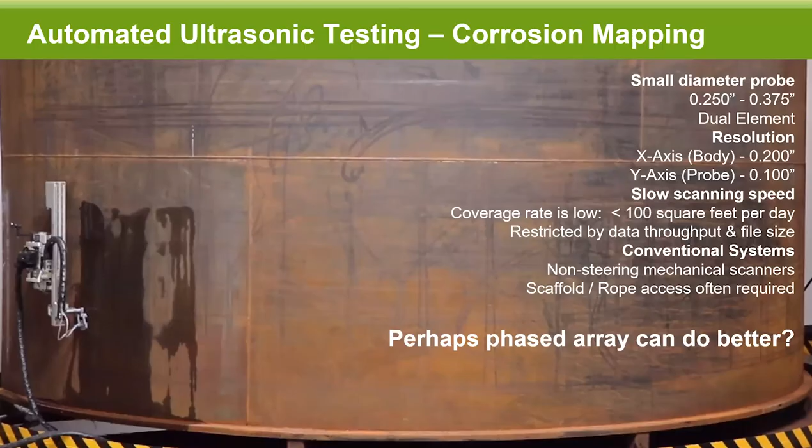Phased array, to sum it up, is multiple probes in a single housing using electronic delay lines to hit those elements to create focusing, steering, and an overall large aperture to work with. You can use linear probes, dual linear probes, matrix arrays, and a combination of a wider range of frequencies. The larger the active aperture of the probe, the higher the productivity can become, especially at 0 degree.

We have the ability to use electronic focusing, and it can be adjusted through the depth. So if we're working with a 1/2 inch material, we can adjust the focalization for the depth we're interested in. If it's 1 inch or 2 inch, we can adjust the focusing for that, provided we have the right probe and setup. We're going to be talking about using electronic and passive focalization today to increase the probability of detection. All of this together provides a very high resolution imaging option for doing damage mechanism reviews.

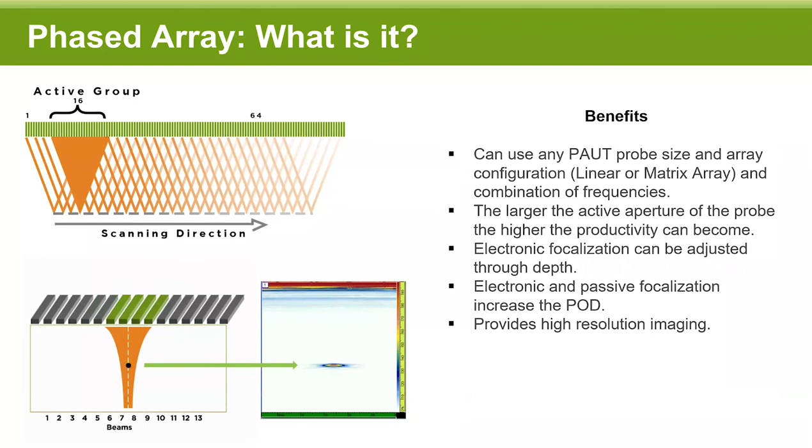Here on the bottom, we have the 3/8 probe doing conventional ultrasonics. The probe is moving 200 thou by 100 thou. On the top, we have a 1 1/4 inch probe that's moving roughly 1 inch every time it strokes. So there's about a 5x difference in the overall speed of the system, reducing 5 raster movements that don't need to happen.

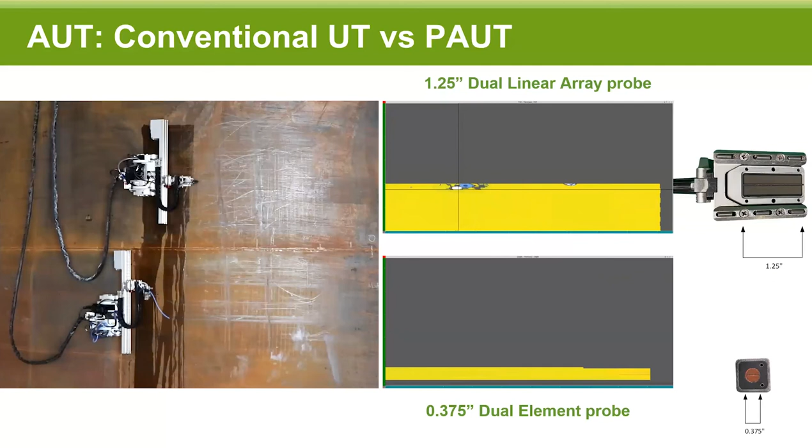Overall, with the traditional AUT down below, what's common is somewhere around a 200 thou by 100 thou resolution. This gives us roughly 50 readings per square inch, or 7,200 readings per square foot. It takes roughly 30 minutes to go 2 foot by 10 foot, so it takes quite a long time to make progress in a given shift.

I've seen these systems also used at a 1/2 inch by 100 thou, creating not really a square image, but you can get a lot of production that way. You can go about 2 foot by 10 foot in about 15 minutes, but then you're not getting 100% coverage. The data creates an image that isn't square, it's more torn in one axis, and it's not good for fitness for service.

So as you reduce or increase the indexing down below 1/2 inch to 200 thou, or 1/4 inch or less, you're going to increase the time it takes to get that imaging done, but overall increasing your resolution.

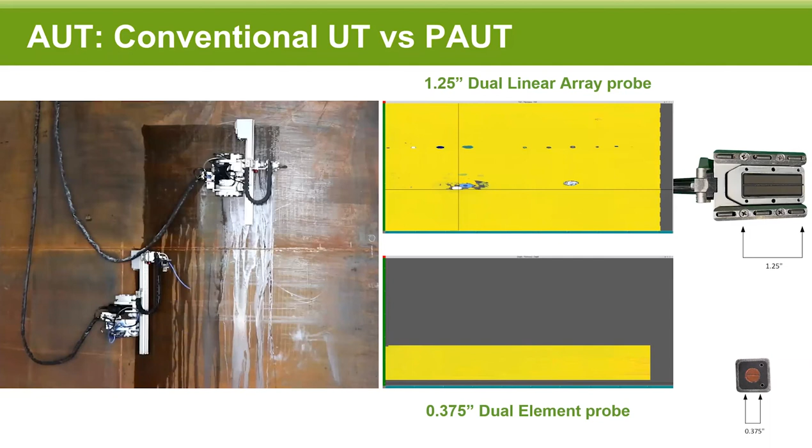Now with the phased array option, we're doing a millimeter by millimeter coverage, which is 625 readings per square inch, and roughly 100,000 readings per square foot. This takes 6 minutes to make a 2 foot by 10 foot scan, providing 100% coverage.

You can see here that roughly the images aren't synced. The one on the right made a 3 foot scan. The actual video on the left is doing a 5 foot scan, but you can see that roughly it's 5 times faster, and it enables you to start looking for any type of damage and start your review as soon as the scan is stopped, versus the older conventional method which is going to continue to go and take drastically longer to get those scans done.

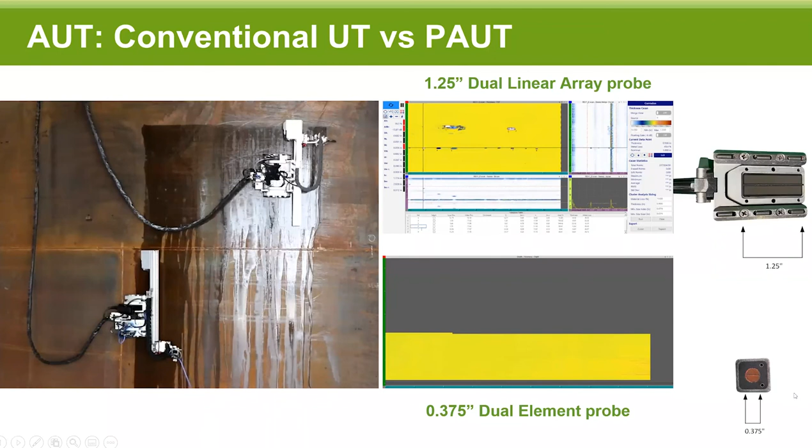So that's kind of a precursor to what we're going to talk about today. We're going to apply this technology for trying to find wet H2S damage. Going from conventional to what we call rapid AUT, applying a phased array to do the things we were conventionally doing with the conventional UT, we can also use it for doing wet H2S damage, but we need to add in multiple other things.

Let's talk a little bit about wet H2S damage. It's a common problem in the oil and gas petrochemical manufacturing industries. It can occur with carbon steel equipment exposed to wet H2S service environments and can come in several different forms. The wet H2S corrosion can be a particularly dangerous form of corrosion because the damage takes place in the interior of the vessel and can occur without warning. There's no corrosion generally at the ID of the vessel. This is happening internally, and it's very hard to detect.

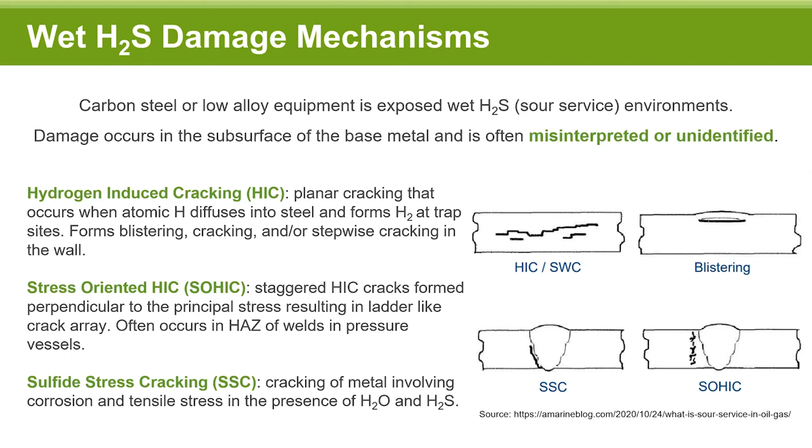So here is the industry standard of the way that this work is currently done.

It's often called a tri-element or triplex technique. These probes are essentially the same setup we were looking at earlier with conventional UT, except you're adding in an angle beam set. Oftentimes you're getting a 45 and a 0 degree, and you're going to want to get that 45 in either an axial and circumferential direction.

So here in front of us, what's very typical is you've got a dual element UT probe, and then you have your 45 in one direction and your 45 in the other direction. This allows you, with it being in one beam and one housing, to capture all this data in one go.

But you use the 0 degree to find laminations and inclusions, and then the angle beam to look for periphery cracking, stepwise cracking in that axial and circumferential directions.

There are many advantages to bringing all these groups together to provide one inspection pass to find damage. However, being that its underlying technology is conventional UT, there are many drawbacks, such as lateral resolution, index resolution, and the production per shift. It's a fairly slow gathering process for scanning the area. Overall, it generally gets somewhere between 80 to 120 square feet per shift.

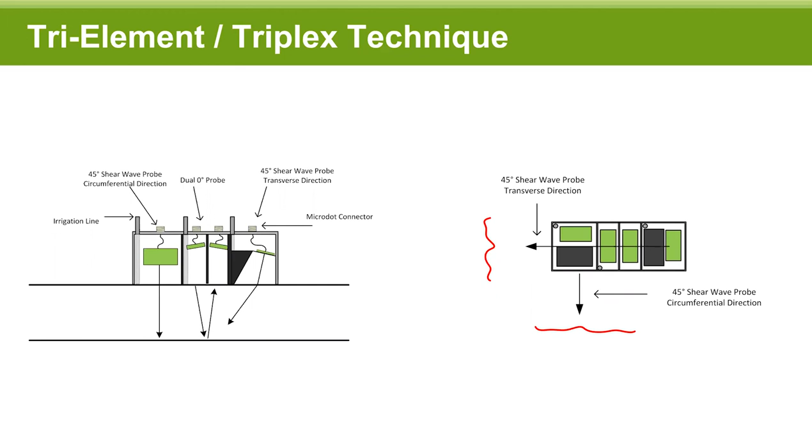Let's dive in a little bit about what that data looks like. Most importantly, the larger issue of the technology is the lack of data density, and the lateral resolution is very poor. It creates poor imaging resolution. This is magnified by the lack of focusing, often out of focus for the range of material you're looking at, whether that's half-inch material or 1 inch or 1.5.

Oftentimes that focus is either beyond or too early in the beam set to be able to accurately do the imaging. This creates fuzzy imaging that often leaves technicians needing to do further prove up, either through phased array or TFM. So there's a lot of drawbacks to it, as far as being very slow to produce the relevant scans that you need. And it always needs some kind of follow-up to make sure you can see the periphery cracking, the stepwise cracking, or any ID touching cracking.

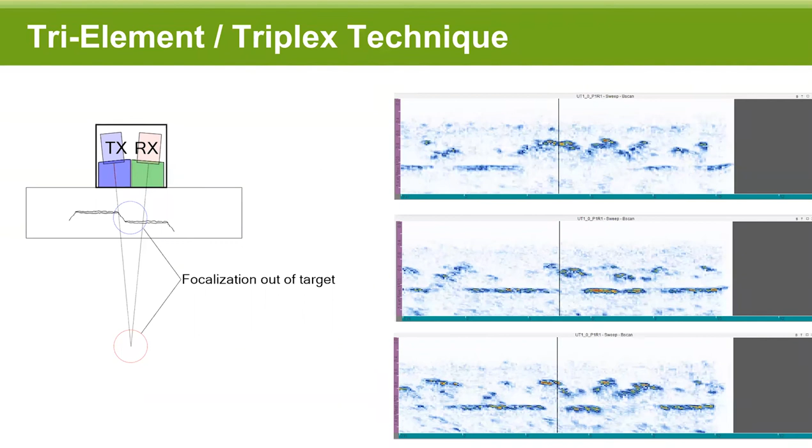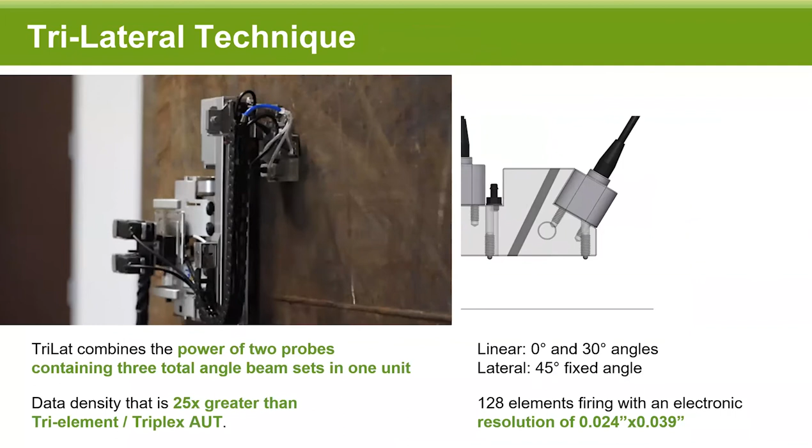All right, let's jump into the next one. So with trilateral, we essentially took that technique and applied phased array to it. This was very challenging to overcome, trying to get those 3 beam sets all in one scan apparatus. But we essentially put 2 probes in a housing with the 3 angle beam sets.

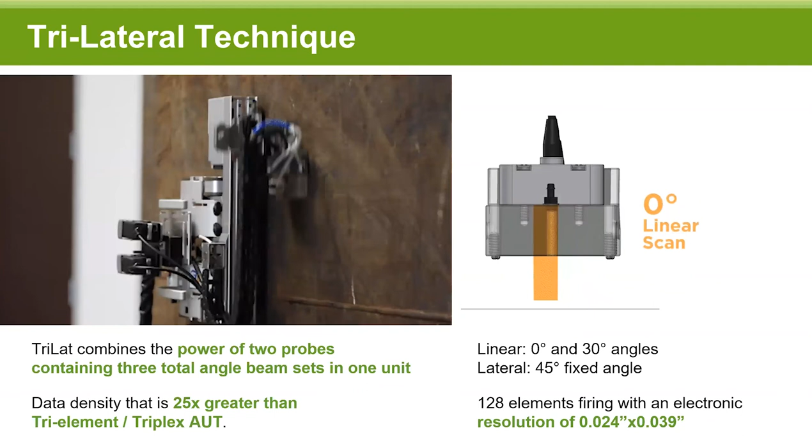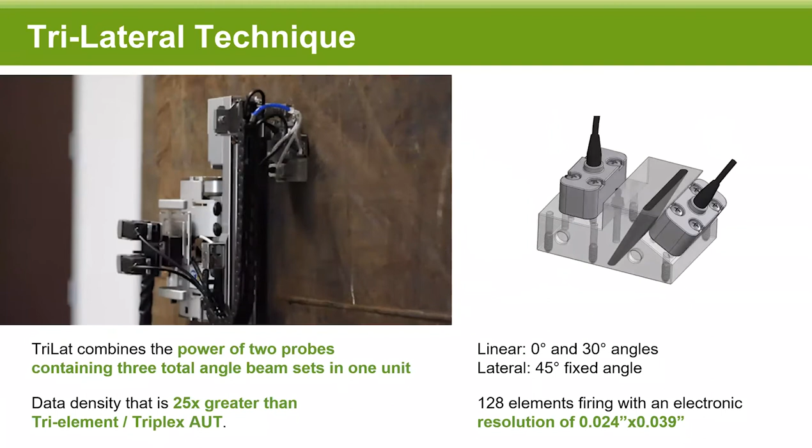There's a 0 degree, a 30 degree, and a 45 fixed that's shooting in the lateral configuration. Having the lateral in the same axis as the 0 degree eliminates the need for several scans to acquire the 3 groups. This is often what was holding phased array back from being a good method for doing HIC.

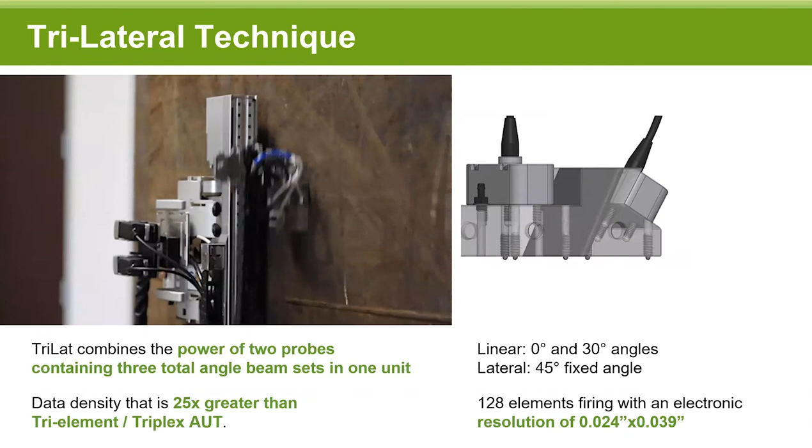Is that it took fairly long to get the data that was required, and you had to scan the surface many times to get the 3 beam sets essentially, and it often would take longer than doing tri-element, or at least the same time.

So when designing this technique, we came up with three different versions of it. We wanted to design 3 groups of the trilateral, one to help with curvature, so it has roughly a 2x speed over the tri-element method. And then we have the original design in the middle that's roughly 5 times faster than the older technology. And then we have a very large 2.5 probe, very large aperture, for doing 10 times the same speed.

This is really good for doing large assets, large vessels, or spheres. It can cover roughly 800 to 1,000 square feet per shift. It's extremely productive and very, very high resolution.

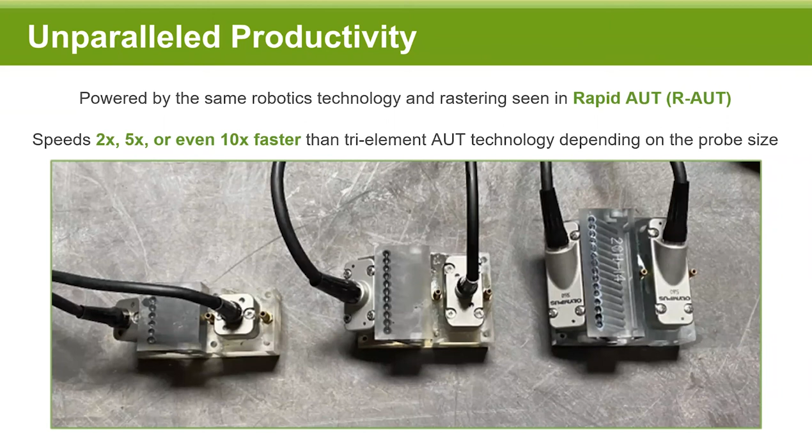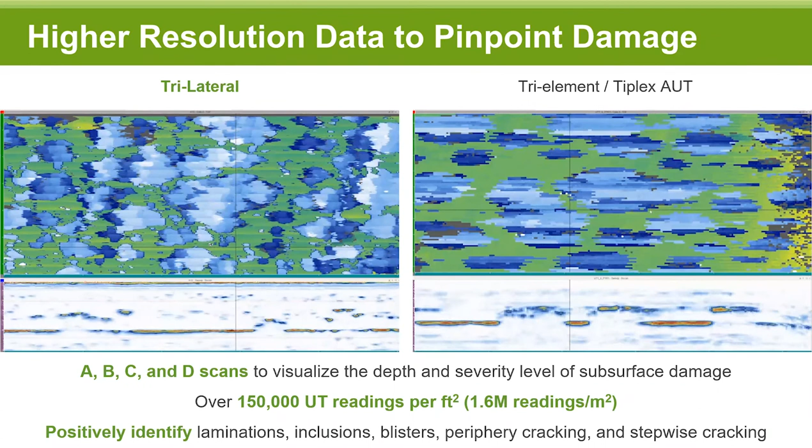So here's that same plate, a static image of it. This gives a really good idea of how good the imaging is, and you can see here there's periphery cracking along with stepwise cracking that's evident in this plate. We have many samples that we've had with this that we've been able to prove out its ability to find the periphery cracking and stepwise cracking.

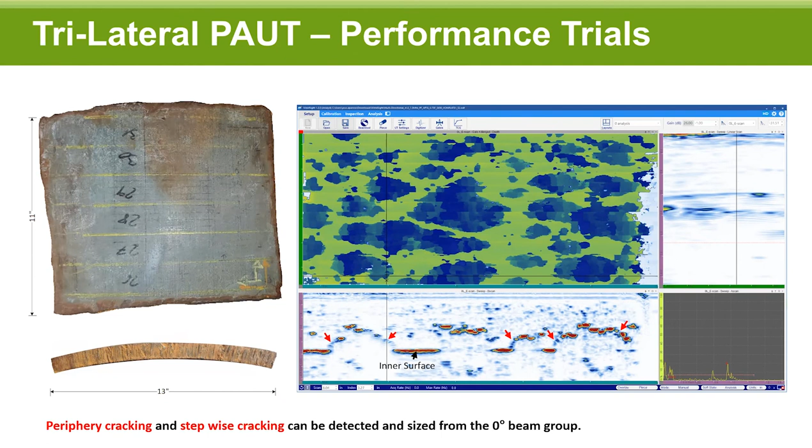This is just the 0 degree, and on the next slide I'll show you some angle beam data as well. For the angle beam, we're able to very accurately size the height of the defects, the periphery cracking or stepwise cracking that may exist. We're looking at exactly the same location as the previous slide. Here we have roughly a 1/2 inch tall vertical stepwise crack along with ID touching periphery cracking.

What's really neat about the C-scan is that we can put this into a depth chart, and we can now see where the laminar tearing is, where periphery cracking is, and where the stepwise linkage may be. So here you can see with the green areas that you have laminar tearing, and in the red areas you have the periphery cracking, and in between you've got the stepwise cracking as well.

So by having the high resolution data, we can now put it in a depth chart and very accurately screen a large area, 10 square feet, 20 square feet, and very quickly pick out the worst areas. Rather than looking at this in an amplitude chart and going through every single B scan, especially with a lot of hits, that can be very time consuming. Now we can put it in a depth chart and pick out some of the worst areas to evaluate really quickly what is the condition of the asset.

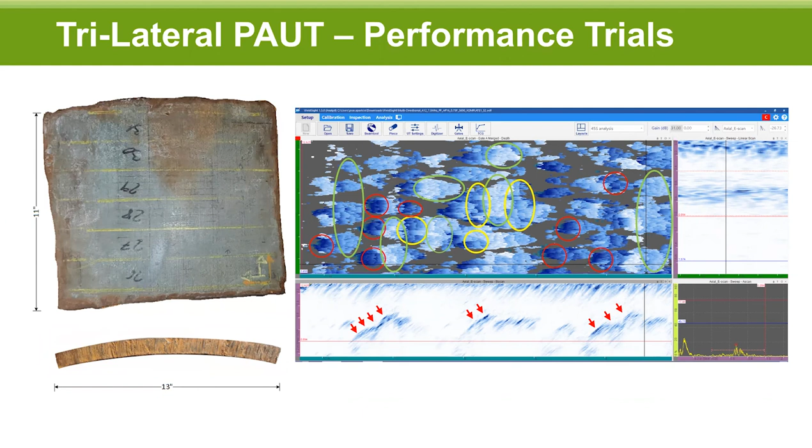Hey, Chase, yeah. We've got a couple questions that have come in here. Sure. One question is, do we require a splitter? And back to your probe selection.

Sure. Based on the setup we're using, 128 channels, typically using a 32-128 or a 64-128 system. So to connect those two 64 element probes, we're using a splitter. Yes, so we're using up all the available channels on our phased array instrumentation.

Great. And then another question, going back to the probe selection, we understand that there's different probes for production rates, as different shapes and sizes of spheres, upwards of bigger vessels can use a larger probe. How about for thickness? Is that something that we choose? What type of probes for different thickness of materials, or where we expect those flaws to be within that material?

Sure. So inside roughly 3 inches of material and below, we have a probe selection that is very adaptable to pretty much everything in between. Other than curvature, we would have to look at other forms for curvature. But when it comes to the overall element size, pitch, and whatnot, we have a good probe selection for covering materials less than roughly 3 inches. For going 3 inches or more, we would have to look into using a different aperture setup, using a different probe setup to take it further into thicker materials.

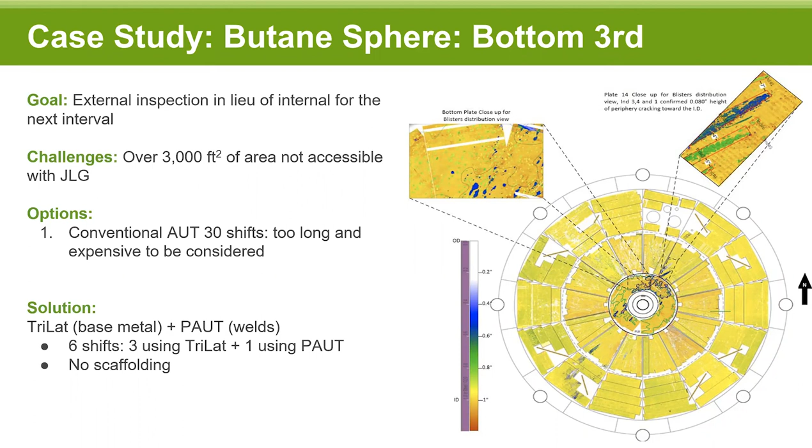The overall outcome on this particular vessel was that we achieved their non-intrusive inspection, but we did find significant damage that they were unaware of was there. Some hydrogen blisters with ID cracking or ID periphery cracking landing on the ID. Lots of mid-wall damage as well. But the main thing is we had that periphery cracking touching the ID.

Then they did wet mag and they were able to confirm that periphery cracking that was landing on the ID that we were seeing.

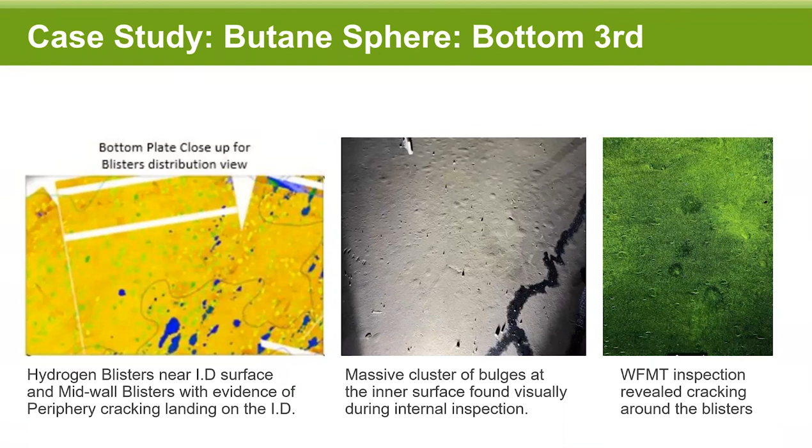And our next application of it, we did an SRU tower. This tower was some kind of stripper column of some sort, stripping off SO2 or H2S. They also wanted to do a non-intrusive inspection prior to a shutdown. They wanted to get good insights into what planning they needed for the turnaround.

We did 750 square feet with limited access. There were only 2 decks on the vessel, so we did everything robotically. The alternative was them doing an internal manual UT wet mag, and by doing the inspection this way, it leaves really no time for turnaround planning, requiring no timeline for them to be able to create repair plans and things like that. So by doing it externally, we were able to give them the insights they needed prior to that turnaround as far as the health of the vessel and planning out that turnaround. And we were able to do that in roughly half the time as the older method.

Got one more. Chase, I've got a question here for you. Going back to the sphere case study, were we able to size the cracking and damage before making entry into the vessel? Yes, we were.

A critical part of this technology is that over the triplex or tri-lat method, what we're trying to achieve here is the ability to see mid-wall damage, see laminations and inclusions, see whether or not they have damage, and then whether or not we have blisters or periphery cracking, whether or not any of that mid-wall damage is connected to adjacent damage that has stepwise cracking in either the axial or circumferential direction. We're able to accurately find all of that and characterize all of it.

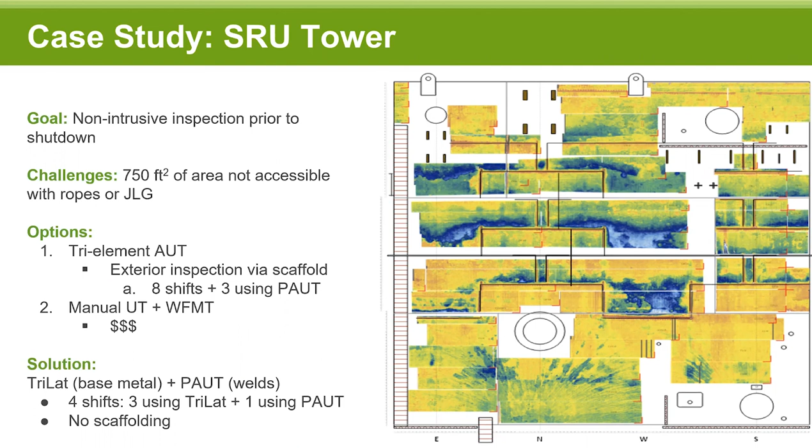Chase, there was a question about whether we have the ability to show the depth chart.

I could, if whoever's asking that question is interested in reaching out — I'm more than happy to show more information in a one-on-one type meeting. I've got lots of really good examples we can dive into for some technical stuff beyond what I'm showing here today.

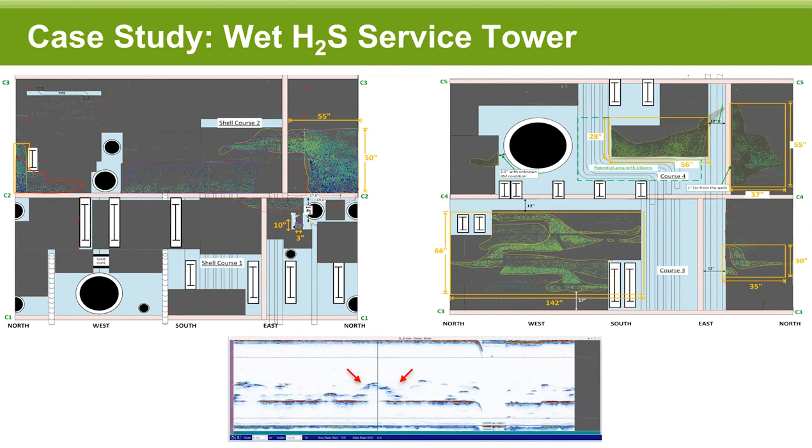Other than that, I think this is my last slide. So to sum it up: robotics, mechanical rastering with the phased array, and electrical scanning can provide a new paradigm shift as far as productivity — generally somewhere between 5 and 10 times faster depending on the probe setup, with a 25x resolution increase, or 10x on corrosion mapping and 25x on high resolution trilateral scanning.

This provides AUT inspections of in-service assets with full coverage using steerable robots that can drive around on the asset. We just need access at one point, and then we can drive the robot around the asset. Rope access, in most cases, is generally not needed — we can get to most locations through common decking or a JLG access.

Overall, this reduces the cost of the inspection as a whole. Most times I'm seeing inspection work scopes that are in the 30 to 40 day range reduced to 5 to 10 days or less. So it's very common for it to be 5 times faster in general.

Also, with the data density, we can characterize the damage with a really fine tooth, high resolution approach, and we can provide the operator what he needs to make confident calls — reducing false calls, false positives, and the errors that commonly happen with this type of inspection that either need follow-up or result in missed calls.

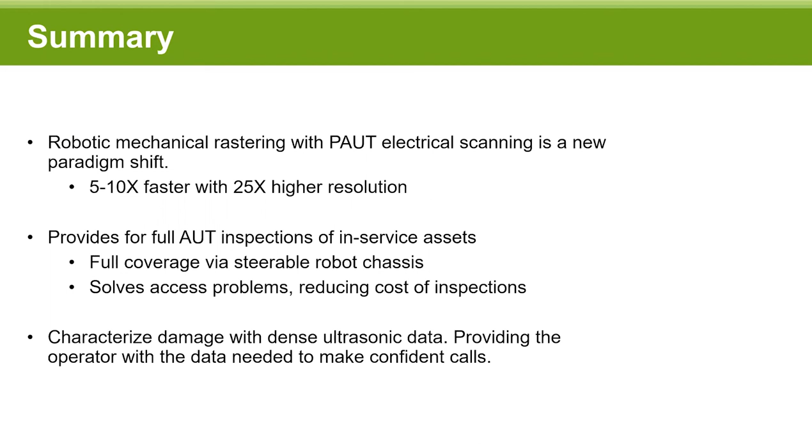Okay, thanks Chase, I'll have a couple more questions here — I'll group a few of these. One is on the robotic side: any sort of temperature limitations, or how high can the temperatures be for this application? And also, what distance can the robot travel or climb?

Okay sure. Generally we use water as couplant, and with the hardware constraints of the typical setup, we're constrained to 240°F.

That's our constraint when using water and having a high production with what we're doing right now. Now, if we look at using other couplants, we can increase that up to about 300 or so, 320 degrees with the same hardware that we're using today.

And then going beyond 300 degrees to maybe 500 degrees is much more challenging. A lot more constraints become, it becomes a little more problematic. We can provide solutions for 300 to 500 degrees, but there's a lot more planning involved and timelines that need to be adhered to, to make it actually happen quickly. It's not something that we can just deploy next day like we can with this.

Thanks, Chase. And then one other question here: are we looking at this for H2S and other types of hydrogen damage? Sure, yeah, good question.